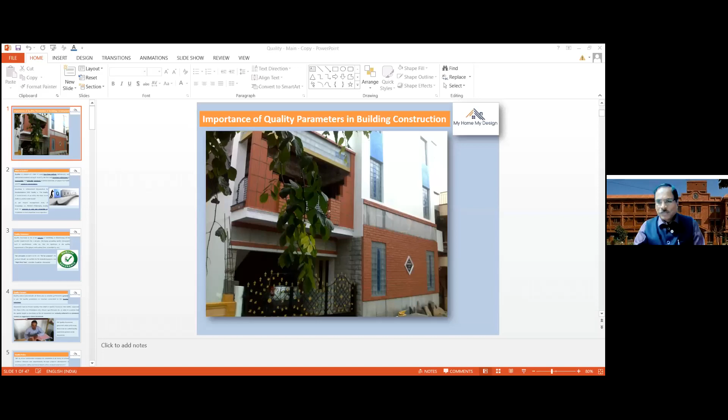So today's topic is importance of quality parameters in building construction. Why is quality important? What are the aspects of quality? If quality is not implemented in the buildings, what is going to happen? And how effectively the quality parameters have to be implemented in the buildings. So this is very, very important.

And what IS standards say, what our Bureau of Indian Standards, or what we call IS standards, says about everything - we will be able to learn with this presentation. So I need all your cooperation.

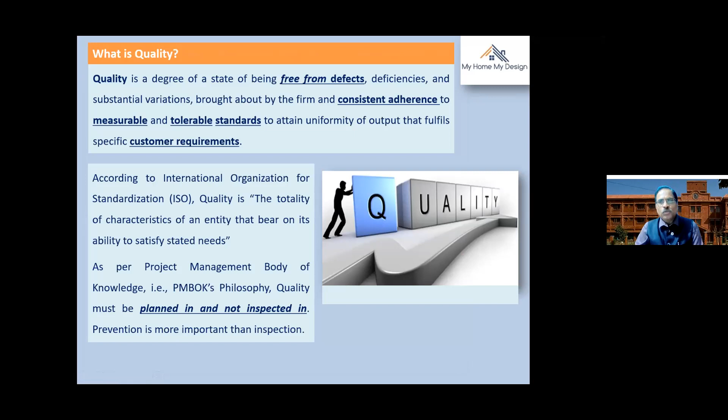So first of all, what is quality? Quality is a degree of state of being free from defects, deficiencies, and substantial variations brought about by the firm and consistent adherence to measurable and tolerable standards, to attain uniformity of output that fulfills specific customer requirements. So that means quality is nothing but the customer requirements - it has to fulfill the customer requirement.

How should it fulfill? It should be free from defects. At the same time, it has to have consistent adherence to measurable standards. So if you compare one product with another product, it has to be measurable. So that is one thing.

And tolerable standards - if slight variations will be there, that slight variation, whether it is in the acceptable standards or not, is probably in terms of mm. So that is why quality should be free from defects, and it should adhere to measurable and tolerable standards as per customer requirements.

According to International Organization for Standardization, that is ISO, quality is the totality of characteristics of an entity that bear on its ability to satisfy stated needs.

As per Project Management Body of Knowledge, that is PMBOK philosophy, quality must be planned in and not inspected in. Prevention is more important than inspection. Yes, when we go for inspection, quality has to already be in place.

So this is what we call quality assurance. Whatever assurance we are going to give to the customer, it has to be documented, in a proper language and a proper record. And the same thing, if you can implement it on the ground, it is called quality control.

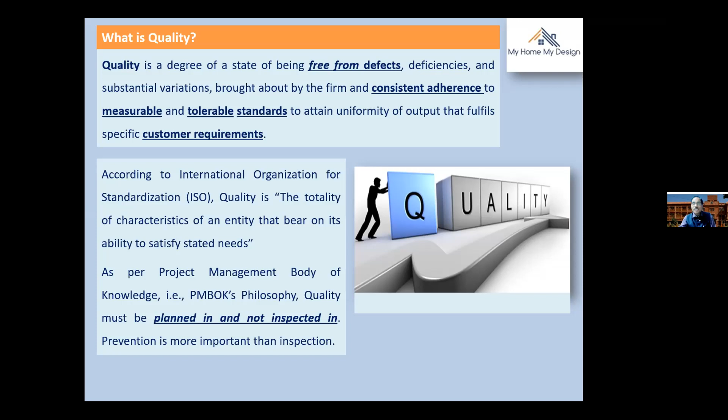So we will see some of the aspects of how we can maintain these quality standards.

That means with quality assurance, we are giving assurance to the customer about what we are going to do in the field. So right in the beginning itself, we state this is our SOP, this is our records, this is our specification, and as per IS codes, this is what we are going to do. So this is the assurance we give in the beginning for the customer - that is called quality assurance.

So before putting it to use, we will confirm that the material is the right kind for our project. That is what is called fit for purpose. To see whether it is fitting for the purpose or not, there are so many tests. So after conducting many tests and satisfying many parameters, only then will we accept the material. So this is called fit for purpose.

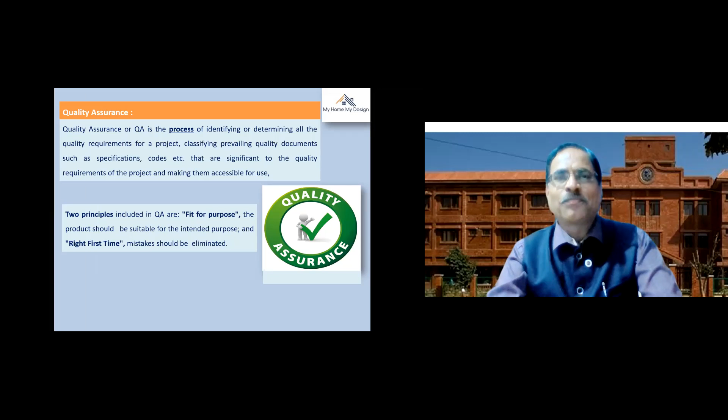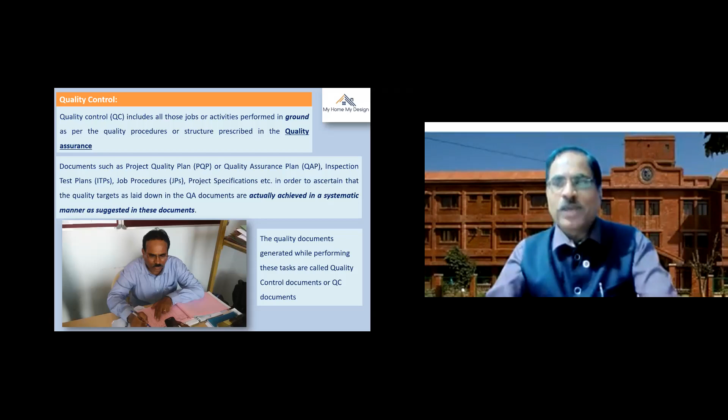Quality control includes all those jobs or activities performed on the ground or project as per quality procedures or structure prescribed in the quality assurance. Whatever we assure in the quality assurance to the client or customer, the same thing has to be implemented on the ground without compromise on quality. This is called quality control or quality monitoring. Somebody has to be there while the construction activity is going on, to see whether all these things are implemented in the best possible way. This is called quality control.

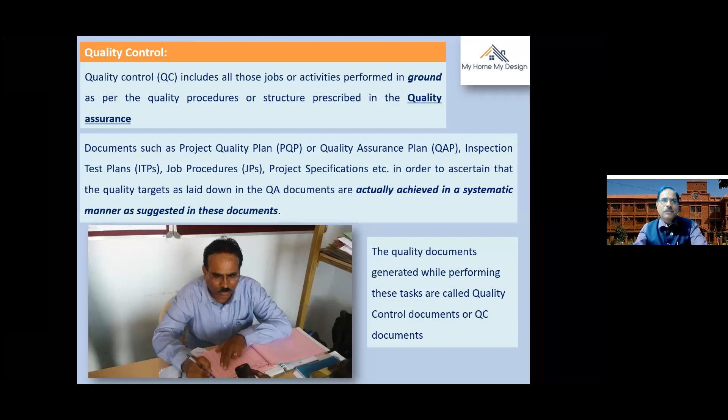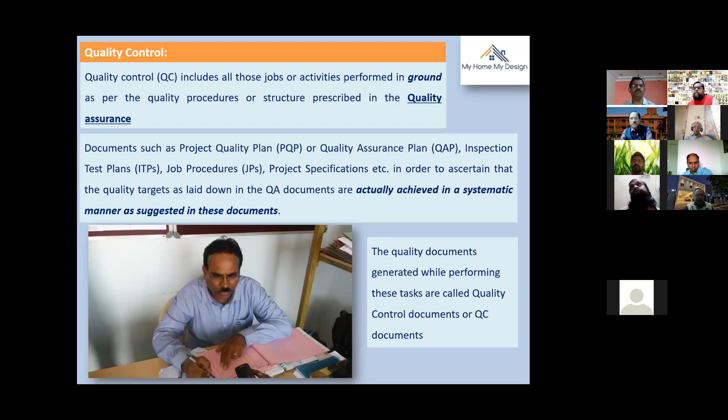Documents such as project quality plan, quality assurance plan, test plans, job procedures, and project specifications are used to ascertain that the quality targets laid down in the QA documents are actually achieved in a systematic manner. The PQP, or project specific quality plan (PSQP), and the project quality assurance plan support the quality assurance engineer to implement all these quality control documents. The quality documents generated while performing these tasks are called quality control documents, or QC documents.

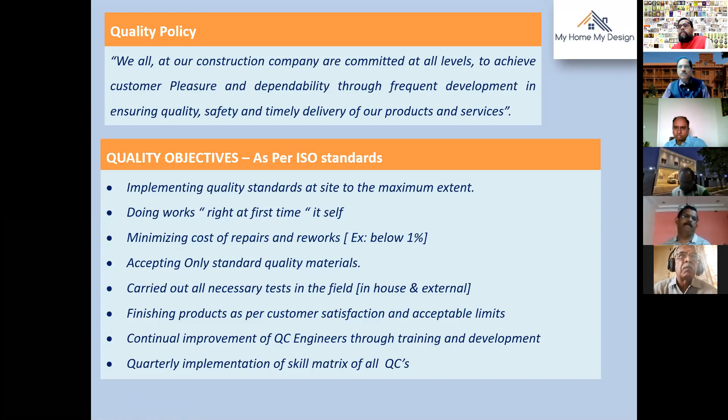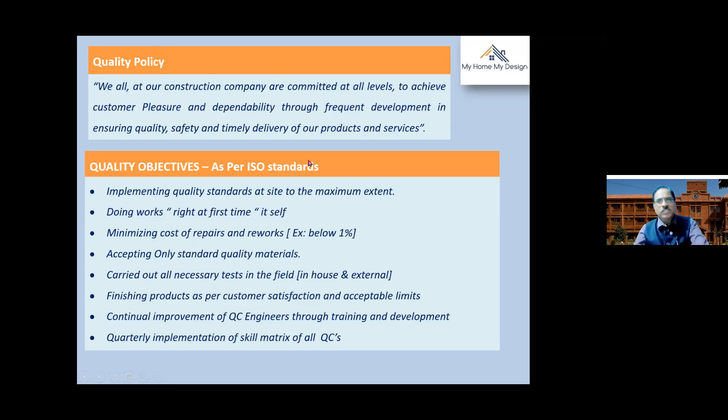Quality policy is simple. Each and every company or organization has its own policy, stating that they are committed to the customer, giving a guarantee that they will fulfill their quality in the coming or ongoing project. This is nothing but a statement. For example, it goes like this: we at our construction company are committed at all levels to achieve customer pleasure and dependability through frequent development in ensuring quality, safety, and timely delivery of our products and services.

This quality policy has to be displayed in the site office or project office, showing the importance given to quality.

Some of the quality objectives, if we introspect, include: implementing quality standards at the site to the maximum extent, and doing work right the first time itself, meaning no rework. Whatever work we do should meet the quality standard. We bring quality into construction and avoid rework or rejob. This is the commitment one should have.

Minimizing cost of repairs and rework - in unavoidable circumstances, rework may happen due to slight modifications of specifications or afterthoughts. But there is a limitation for that - it should be below 1%. Otherwise, if it goes beyond 1% or 2%, it means the project is not planned properly and the professionals have not thought things through.

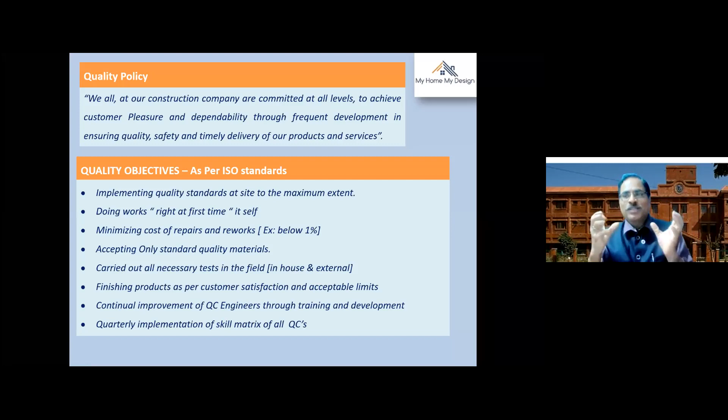Accepting quality standard materials only is very important. As a thumb rule in civil engineering, 70% of the component is material, and 30% is labor or workmanship. If 70% of the component is itself inferior in quality, we cannot assure or give quality for the construction. So we need to accept standard quality material right from excavation till handing over the keys.

We carry out all necessary tests in the field, in-house and external, to ensure the quality standard of materials. There are so many tests, which I can briefly explain in the coming slides.

Finishing products should be as per customer satisfaction and acceptable limits. Continual improvement of QC engineers through training and development is very important - we need to give training to all engineers implementing quality standards at the site. Somebody may be expert in some items, some in finishing works, some in structural works, but we want all-rounders, not just experts in one faculty or another, though we do require those specialists too.

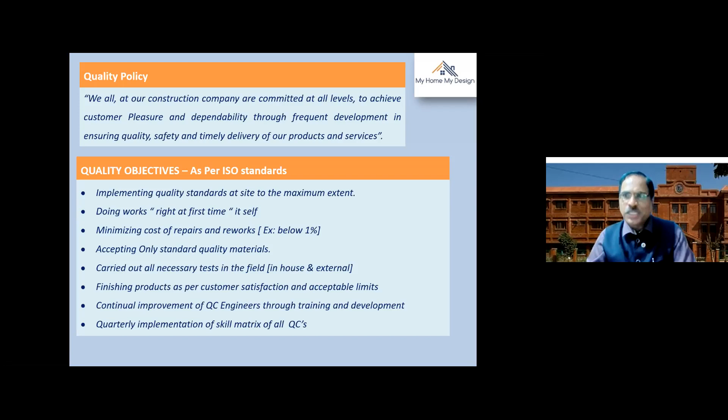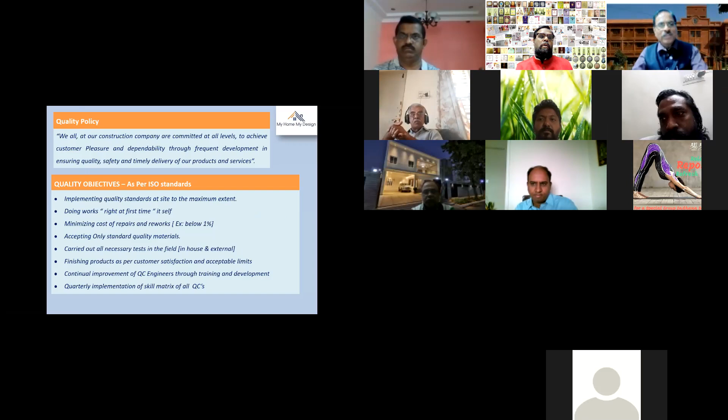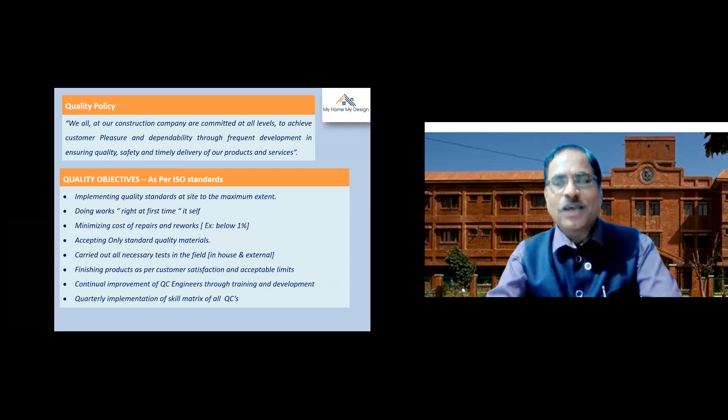If we give training to the QC engineers, overall implementation of quality can be achieved within a short time. Quarterly implementation of a skill matrix for all QCs - quarterly meaning every 3 months, we do tests and interviews and mark their strengths, and how effectively they are doing their work on site. We monitor everything, and based on this skillness and performance, we use this skill matrix for all engineers to conclude which engineer can do wonders in the field.

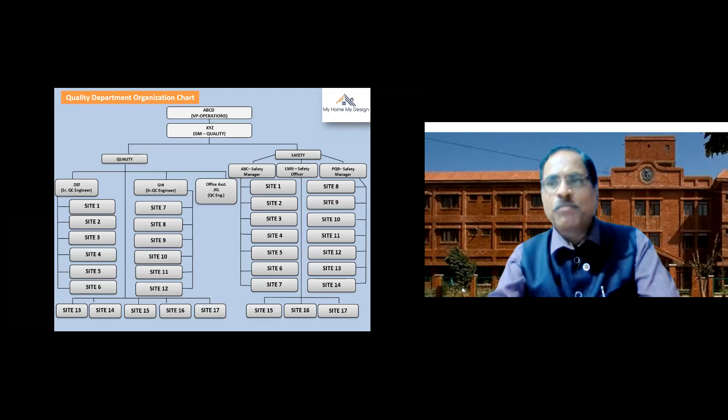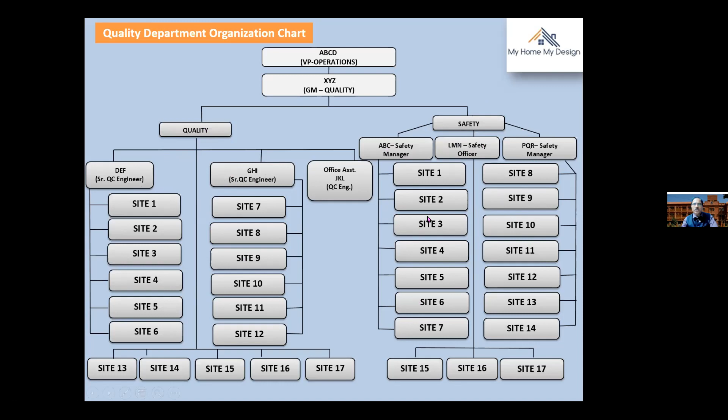This is just the quality department organization chart. Any standard project will have this type of organization chart. For example, the VP is the operations head, and the quality head reports to the VP. He manages not only quality but also the safety organization. Respective engineers and teams across many sites report to him, and in safety, many people assist him so he can monitor everything.

So what is the role of a quality control engineer? This is very important. The quality control engineer reports to the project manager and is responsible for many things. He must ensure quality records, acceptance limits - which are always plus or minus 1mm, 2mm, 3mm - machinery and equipment calibration certificates, and documentation of specific items and building areas are prepared and collected in accordance with project requirements.

He must coordinate with the planning and quantity surveying department to ensure milestone dates are understood for each activity. The quality job is challenging - the quality control engineer not only monitors and maintains quality aspects but must coordinate with the QS department since progress is very important for any project. He must identify milestone dates while not compromising on quality - balancing both progress and quality monitoring.

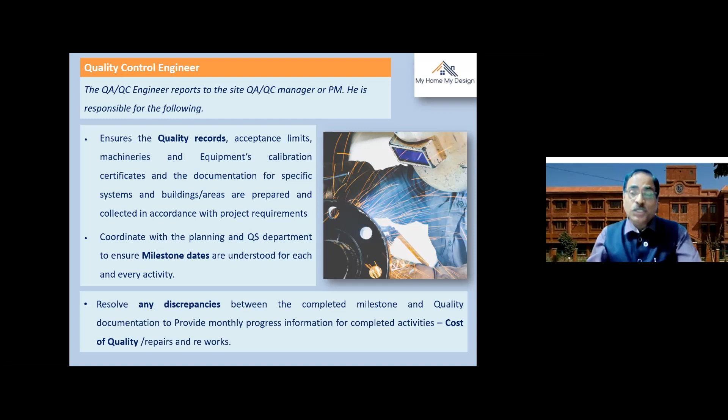He must resolve discrepancies between completed milestones and quality documentation, and provide monthly progress information for completed activities, cost of quality, repairs and rework. If repairs happen, why did they happen? What is the reason, and what is the cost involved? Everything has to be identified and documented in these records.

He must maintain all quality related documents on a daily basis, and get them certified from the project manager, project management consultants, and clients. All points mentioned in the checklist - before, during, or after respective activities - must be strictly followed and updated with the signature of the site engineer, project manager, and client's representatives on the same day.

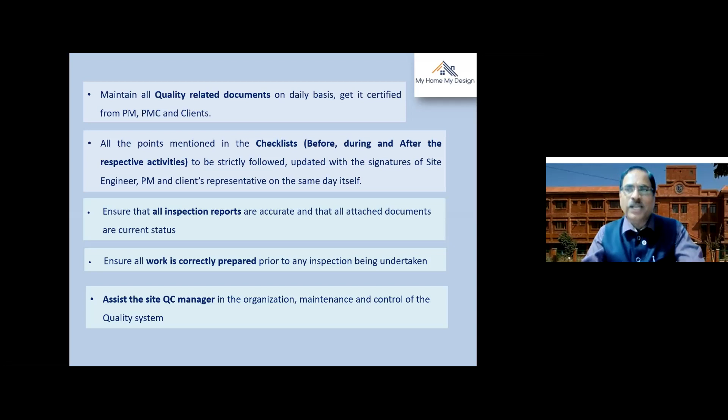This is going to be very, very important. If something happens in the construction, all these documents are witnessed by many people - project engineer, project manager, quality engineer, and the client - they all put their signatures. This is actually the right method to be implemented in all project sites.

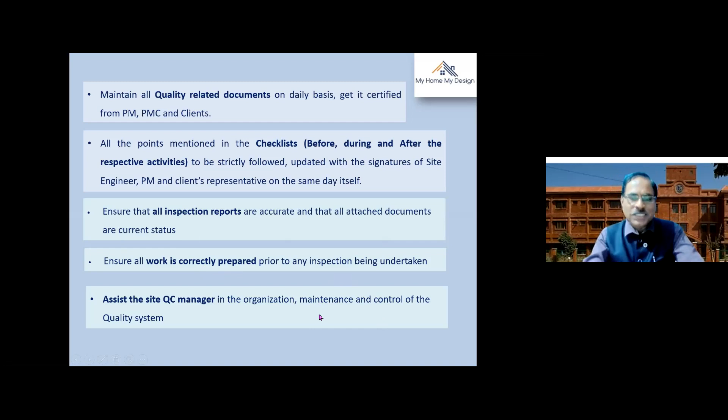He must ensure all inspection reports are accurate and all attached documents are current. He must ensure all work is correctly prepared prior to any inspection being undertaken, and assist the site QC manager in organization, maintenance, and control of the quality system. These are important points to be implemented in quality control, and he must prepare non-conformance reports to the QA manager and assist in developing corrective actions.

What does non-conformance mean? As the name indicates, there are measures as per IS standards, our specifications, bill of quantities, and ISO standards. When something is not in conformance with civil engineering standards, it's called non-conformance. We need to identify that, and a report has to be prepared and submitted to the quality manager - this is called a non-conformance report or NCR. The project quality engineer has every right to raise an NCR if he is not satisfied with any activity.

He must review work procedures and method statements for compliance with good practices and the contract or tender documents. These method statements and work procedures are very important - they explain how each activity has to be carried out as per civil engineering norms. For example, earthwork is not an ordinary thing - it has to be done as per specifications, as per line and level, and everything has to be monitored. Step-by-step procedures exist, and the activity must follow that procedure. This is called work procedures and method statements.

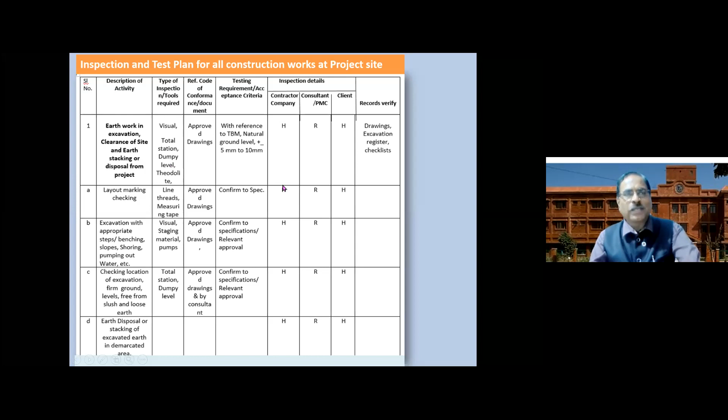For example, the chart will help us identify some of the factors here. I will not go into full detail, just mention one or two items - the inspection and test plan for all construction works at the project site.

This is called quality assurance, QA. So the test plan - we are submitting this test plan in the beginning to the client.

So what is this? Serial number, description of activity. For example, earthwork excavation, clearance of site, and earth stacking or disposal from project. Imagine this is an activity.

So what are the methods, how it has to be done? Type of inspection - this is visual inspection, and necessary tools required: total station, dumpy level, theodolite. With the help of this, the excavation can be carried out. Reference documents are approved drawings, testing requirement, acceptance criteria.

With reference to temporary benchmarks, natural ground level, plus or minus 5mm to 10mm - this is the tolerance factor accepted here. Coming to the inspection point, contractor company is held responsible. Consultant is the reviewer, or PMC is the reviewer. Client is again responsible.

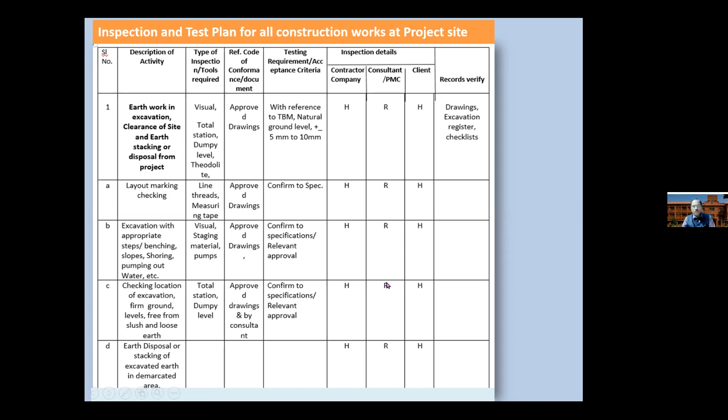Coming back here, for earth disposal or stacking, again the necessary total station, approved drawing, and contractor held responsible. Reviewer - PMC is the reviewer, and client is held responsible. Sometimes PMC is going to be the witness for the particular item, important work here.

He has to witness and put his signature here to determine the maximum dry density and optimum moisture content. How to do that? Hot air oven or rapid moisture meter - this is the method of instrument we are going to use for this soil test. This is the tool we are using.

The approved drawings are as per IS 2720, 1973. As per this, we are going to do this, confirming standards, confirming specification. Who is responsible? Contractor is held responsible. PMC is the witness. Client is also reviewer.

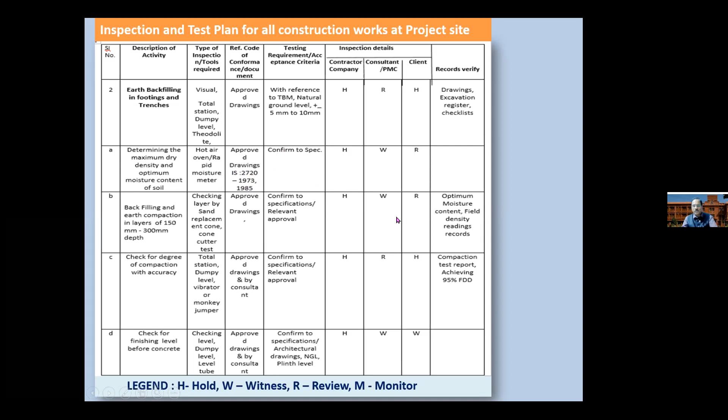So like this, there are many charts. With this chart, we can cover the complete activities. Coming to the strategy or business plan, these are all the important points we need to cover.

First one is statutory and quality documentation. The project name has to be displayed here, and the project duration, month-wise, has to be displayed here, along with the remarks - what are the comments to be marked here.

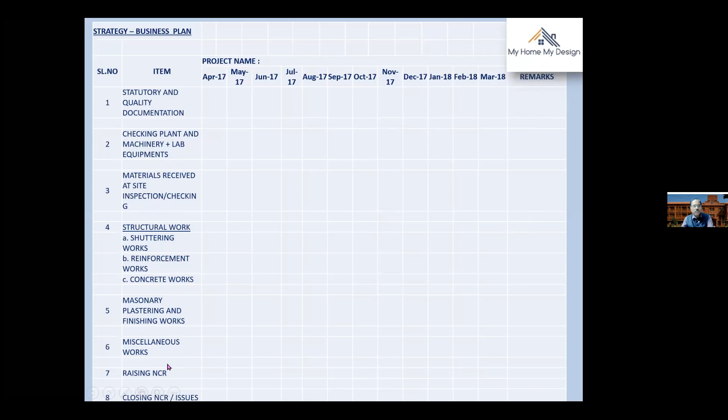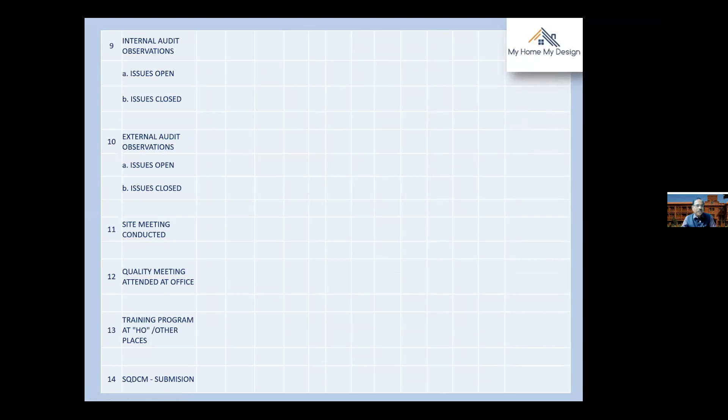Statutory and quality documentation covers: checking plant and machinery plus lab equipment, material received at site, structural work, shuttering, reinforcement, concreting, masonry, plastering, finishing, miscellaneous work, raising NCR, closing NCR, internal auditing, external auditing, site conducts, quality meetings, training program, SQDCM. These are all the points we need to go for.

Coming back to this statutory and quality documentation, why is it very important? Statutory documents, as per government norms, some of these documents are very important, and without these documents, construction will not happen.

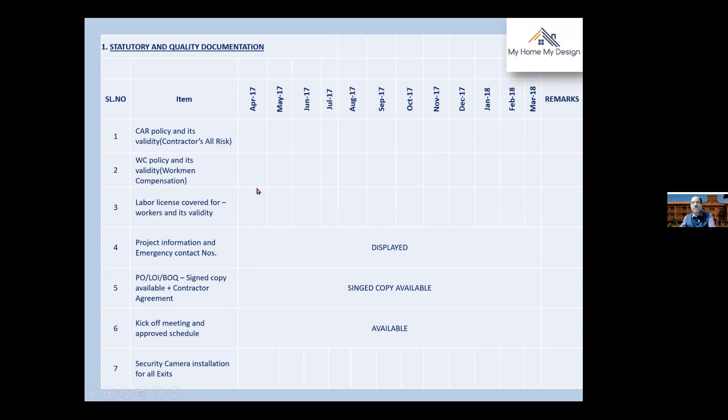Every point here is very, very important. We are not supposed to neglect not even a single point here.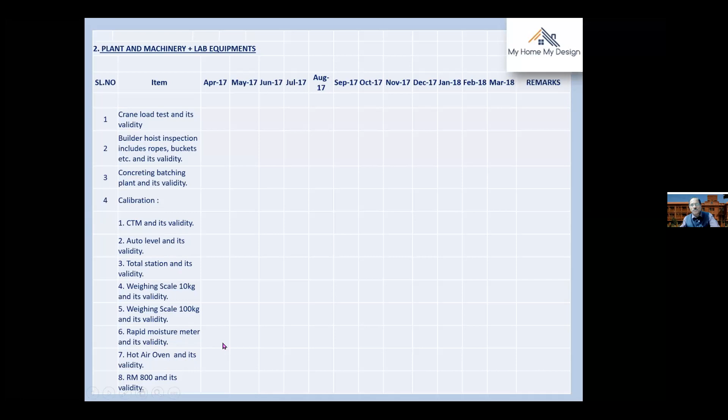Calibration is again important for compression testing machine, auto level controller, total station, weighing scale 10 kg, weighing scale 100 kg, rapid moisture meter, hot air oven and its validity, RM 800 and its validity. All these things are very necessary and important.

This is my favorite chapter, called material checking. For each and every material in the project, we need to examine it, go for testing, and after it satisfies the parameters, only then it can be accepted. Otherwise, if it doesn't meet requirements, the quality engineer has every right to reject that material if it's not in the quality standards. For example, RMC, ready mix concreting M35 grade.

Imagine this is M35 grade. What are the test acceptance criteria? Daily appearance, the uniformity of the concrete checked visually, slump test, 7 days strength, 28 days strength. These are some tests, and third party testing once in 2 months. This is the test for RMC.

Coming to cement: manufacturing test certificate, float test, approved brand - whether it's an approved brand or not, the brand name to be mentioned here. Initial setting time and final setting time for the cement. All these things are very, very essential and necessary.

Apart from tests conducted in our in-house lab or field labs, randomly third party tests also need to be conducted for compressive strength, soundness, standard consistency, fineness, and setting time. Once in a while we can take some samples and send them for third party testing, that is called NABL accreditation laboratories. There also we need to check.

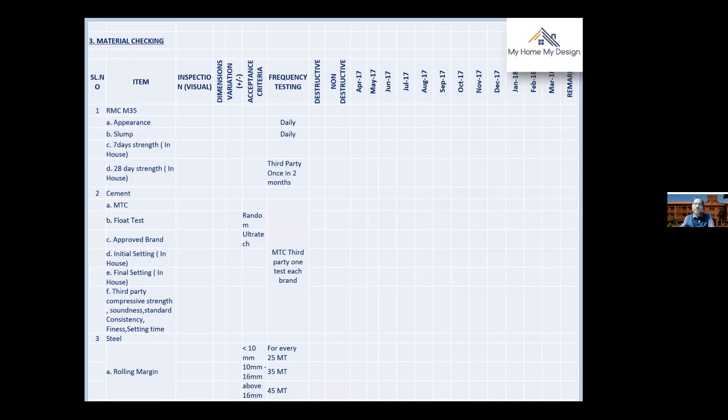Rolling margin: for rods less than 10 mm, for every 25 metric tons we need to go for the rolling margin. If the steel bars are between 10 mm and 16 mm, for every 35 metric tons we can go for this rolling margin. And for above 16 mm diameter rods, for 45 metric tons we can do this rolling margin.

For bricks: dimension, manufacturing test certificate, third party, compressive strength, water absorption - this is visual check, and 20 bricks have to be taken from 3 loads of bricks, that means 6 to 7 samples each, subjected to compressive strength. If it is 35 kg per centimeter square and above, then only it can be accepted as good quality bricks. For each source, 3 numbers to be tested from 20 bricks.

These are some standards. We are not supposed to compromise on these standards. For fine aggregates: sieve analysis, fineness modulus, third-party test - these are all the tests.

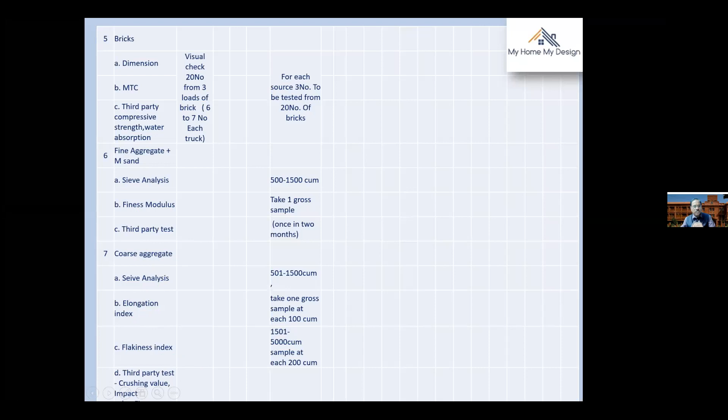Coming to coarse aggregate, again the same thing. Elongation index is one of the important aspects. Fineness modulus, flakiness index, third-party test, crushing value, impact value. And soil is very, very important - the foundation entirely depends upon the safe bearing capacity of the soil. Here also Proctor test, core cutter test, in-house and third party, once for each source of earth at every 100 square meter of compacted earth area. After compaction also, this core cutter test has to be done.

Moisture content, and coming to structural steel: rolling margin, tensile strength, elongation test, bend rebar test, and tiles - MTC, third party test.

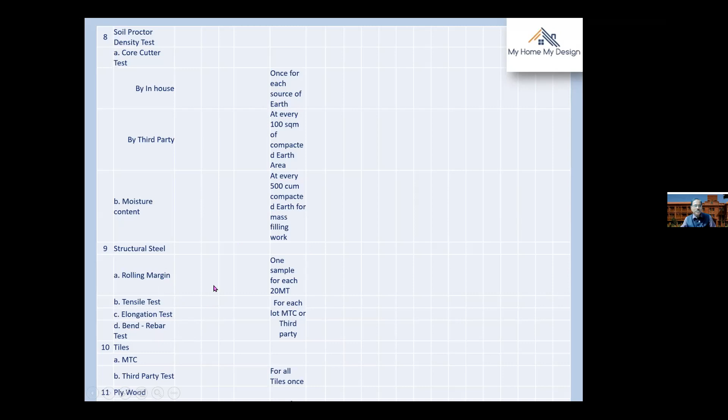Plywood also, many tests have to be conducted. Paints, MTC, kerb stone MTC, paver blocks, electrical wires, cables, conduits, switch box, GI wire, plumbing works, UPVC pipes, sanitary pipes, fixtures, firefighting, MS pipes, welding rods, sprinkler, HVAC. For all these things, manufacturing test certificate, MTC, is required.

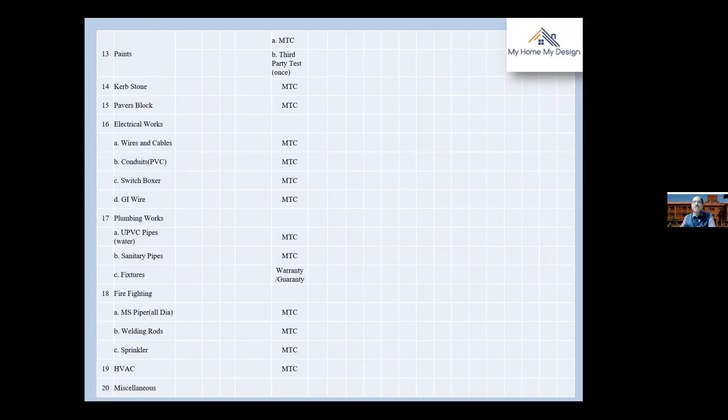So these are all the gist of the items. There are so many materials, so many items. I've mentioned only the important points here. All these important points have already crossed more than 20-25 items. If all these materials are tested as conducted, then only we can say that we are implementing quality standards. So that is pertaining to the material.

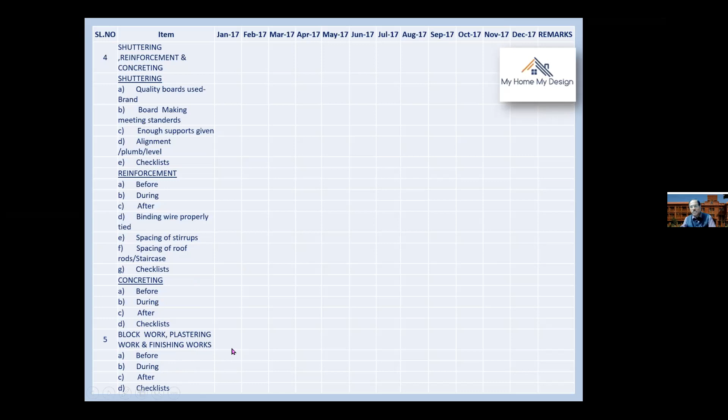Coming to the miscellaneous aspects also—road, drawings, STP, ETP—before, during, after checklist, and raising NCR. If non-conformance is happening, how many NCRs we have issued, how many NCRs we have raised, and whether these issues have closed or not. If it has to be closed, it has to be done in a proper way.

What is the root cause, why it has happened, what preventive actions we have taken, and what is the reason why it happened. All these things, documented with evidence, have to be proved, and then only the issues will be closed.

And internal audit—so internal auditing is the team. The site inspection has to be carried out at each and every stage, different stages of the activity or project. How many points, how many times the internal audit has been done—monthly once, or 3 months once—everything has to be noted here.

Issues open—how many points they have raised, and out of that, how many points your project site engineer or project engineer has closed. Everything has to be recorded here.

If you are very much familiar with the internal audit and giving importance to the internal auditing points, then external audit is very easy to tackle. The external audit is nothing but a third party person, not in favor of the client or customer or engineers—entirely an independent agency, third party audit or external audit.

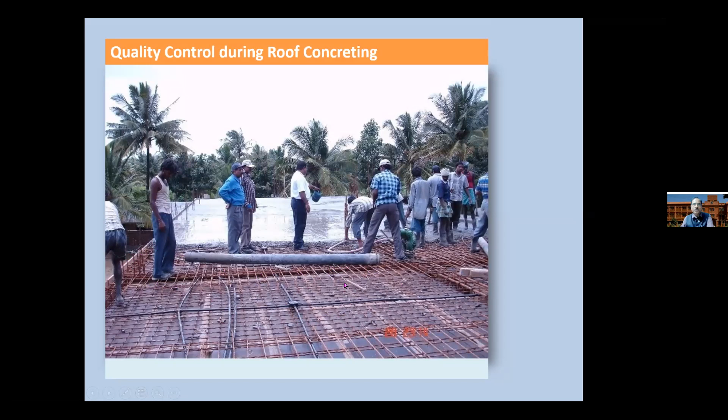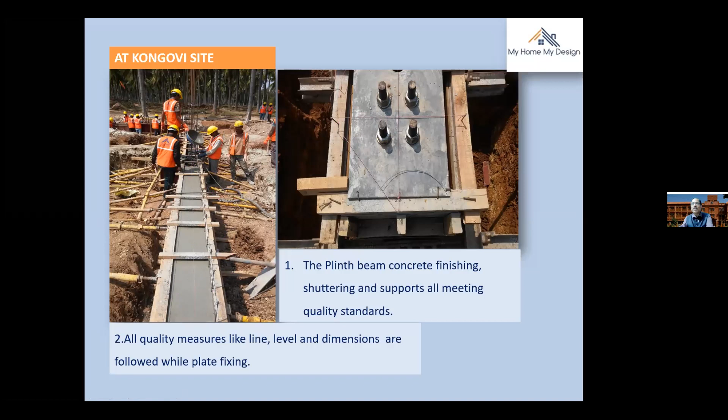And with the help of monitoring, even for the bolts, central foundation bolts, how effectively the center of gravity has been transferred in the field. So even for the minute details, it has to be carried out effectively. That is why quality parameters, quality is very, very important.

If we can do such a type of quality, we can enjoy it, and on the same night when you go to sleep, you will have a satisfaction that today I have done some quality work. So that is the kind of work we need to do.

This is what I already explained before concreting. See, this is before concreting. If these are all in line, even after concreting you can maintain the same line here. So this is what we need to introspect ourselves.

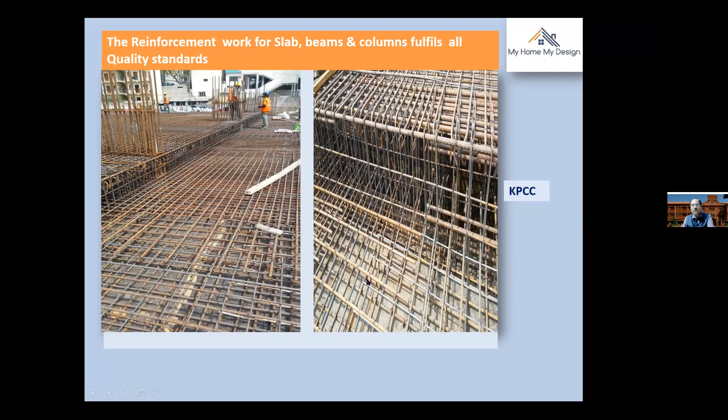Here also in the sunken beam, how closely the stirrups have been monitored, and how effectively the top bars and bottom bars have stayed in position. This is very, very important. We have to give even the minute details that much importance.

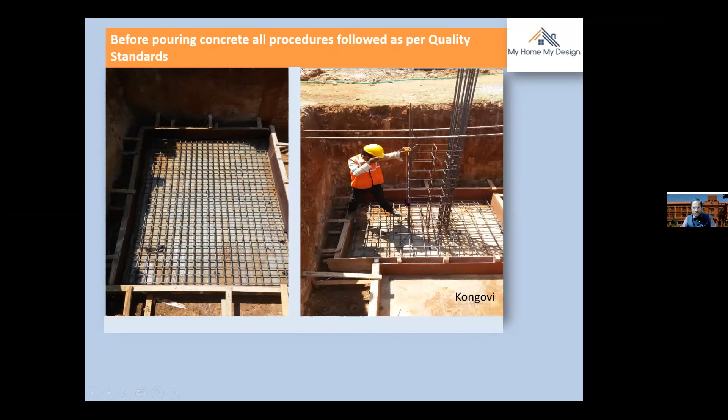And here, before concreting, see how effectively the plumb has to be transferred in the ground. This is one example for the Kongovi Electronics project, what we have done.

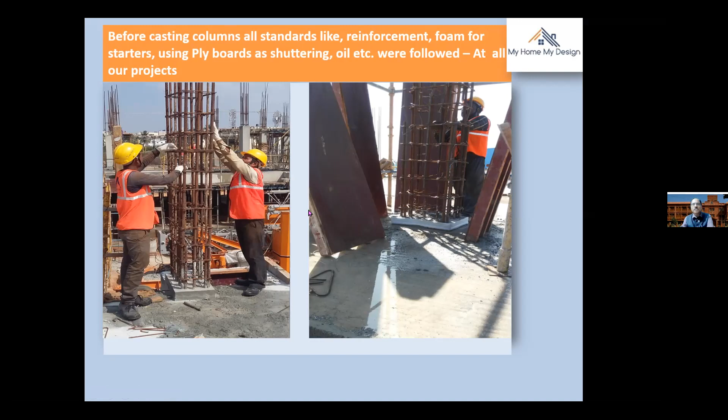Before casting columns, all standards like reinforcement, foam for starters, using plyboards as shuttering oil, etc. were followed at all our projects. See how effectively the gloves, stirrups and everything are monitored, and starters, the foam for starters, plywood with waterproofing oil, shuttering oil and everything in place. These are some of the photographs I'm showing for points we need to check while visiting the buildings.

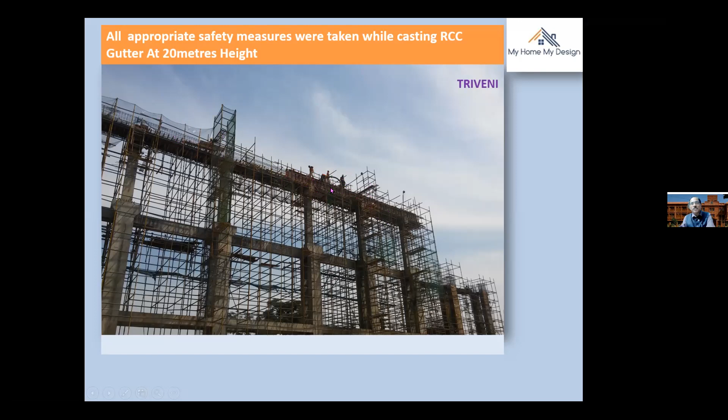Safety is important, human lives are more important, even rather than quality. Compared to quality, safety is paramount important. We are giving utmost importance to safety also here. And see the same gutter, RC gutter at 24-meter height, length 110 meters, under progress, fulfilling all standards.

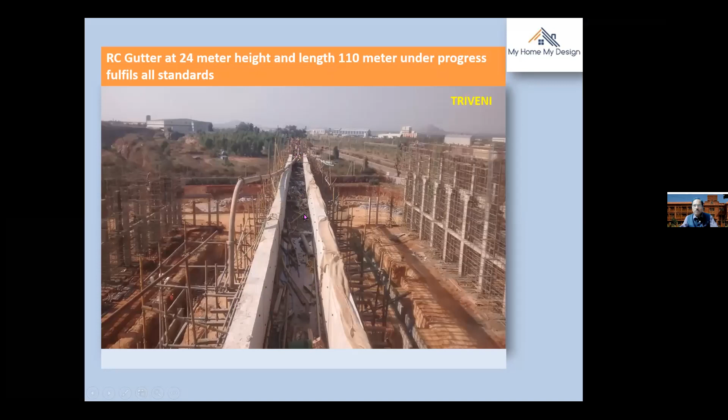Imagine this is 110 meters in length, nearly 350 feet, with a gutter of 1.2 meter depth and 1.0 meter width and 30 centimeters. The two gutters are being carried out here, and the concreting is happening here. Over the full 110-meter length, the line, alignment, plumb, everything, quality standards are maintained.

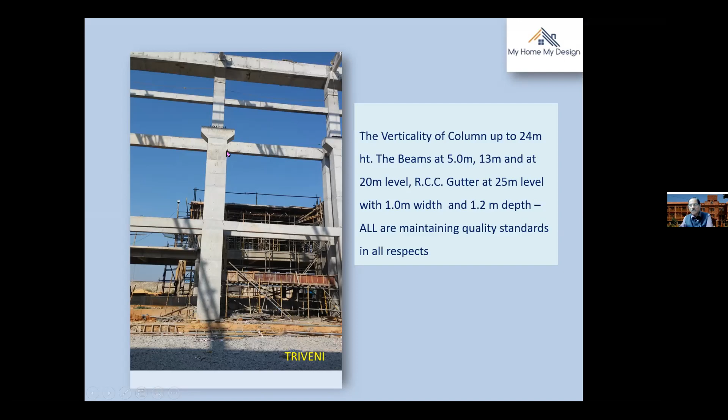You can see in the photograph itself the alignment, length, plumb, everything. So this is the quality I'm expecting. Even if you give importance to the minute details, this is the result you can expect after quality, and this is one example I can give.

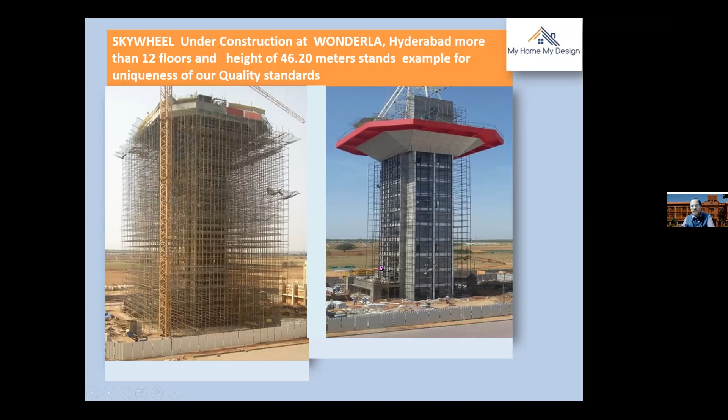You can see the next photograph, the close-up view, you will come to know. This is under construction, the sky wheel is happening here. This is the finishing work, the glazing and everything started here - the Wonderla Hyderabad project.

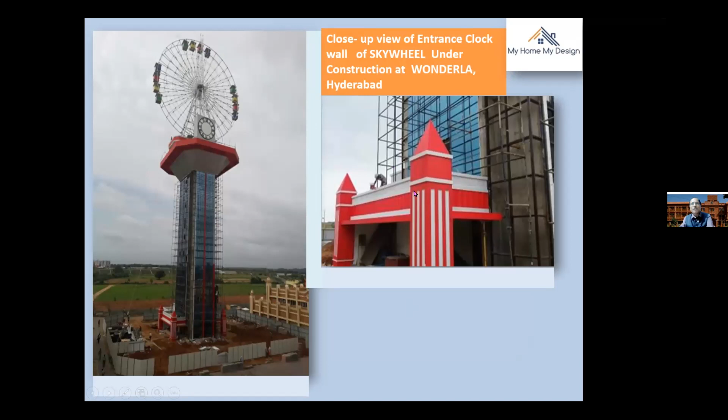If it is 20 centimeters, yes, exactly - from here it is 20 centimeters, and here also it is to be 20 centimeters. That means all the materials have to be intact in a tight, waterproof platform. Then only can you expect very good quality. These are all things necessary in construction.

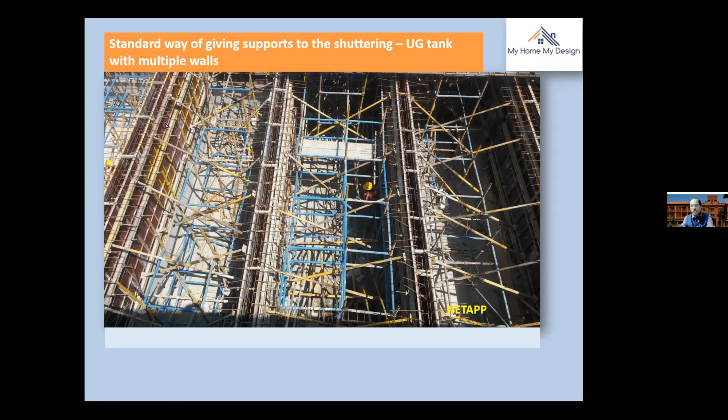And next, quality auditing during the construction of projects. What is the necessity of this auditing?

The red letters indicate that whenever I go to the site and find faults or improvements needed, I always point it out in red. For example, earth backfilling is okay for this particular item, but proper compaction with core cutting needs to be done before 22/7/2016 - that was the deadline I gave, and it should achieve more than 95% proctor density. This was the point I raised in the auditing.

See how effectively the site people took it seriously - the same day they started compacting, and core cutting results everything they started. The core cutting was done on 16/7/2016, well in advance of the 22/7 deadline I had given. At 6:25 p.m., the proctor density achieved was 98.32%. This is the evidence and documented proof.

So this is what I mean by quality documents, which I already mentioned - that is very, very important.

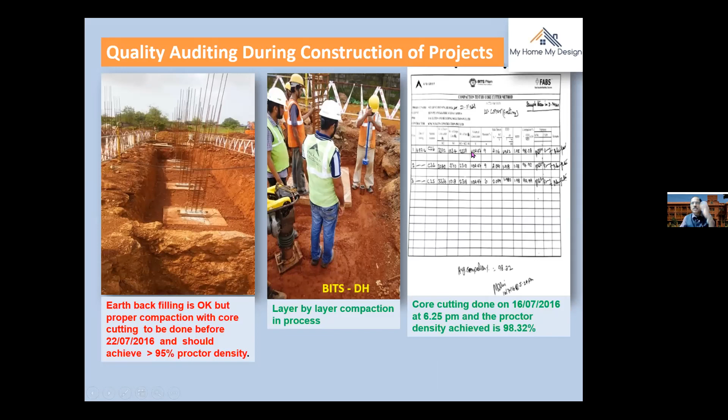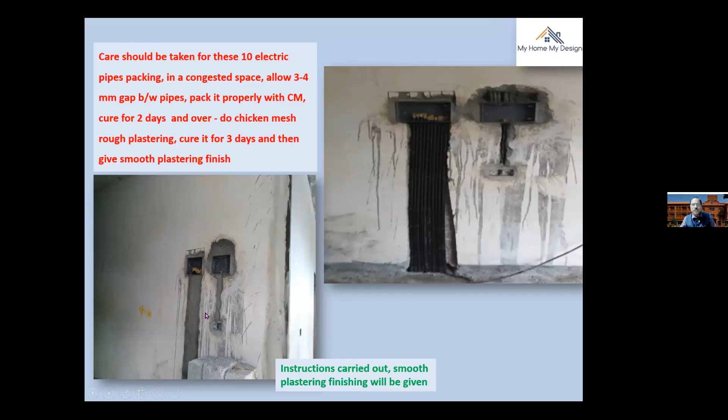And here, this is not acceptable - 10 pipes coming at one place, chasing like this. This is not a standard method. After giving instructions here, they followed the same instruction and fulfilled it. So this is the effective way - this is what we are expecting.

In the NetApp project, the west side compound wall near the main building had bulging that needed to be rectified. See here, how much bulging you can make out from the naked eye itself - this is not acceptable. So in this case, an NCR was issued.

I gave the solution also - rectified with the grinding machine. They completed it effectively - in the same photograph you can see the compound wall bulging rectified by grinding.

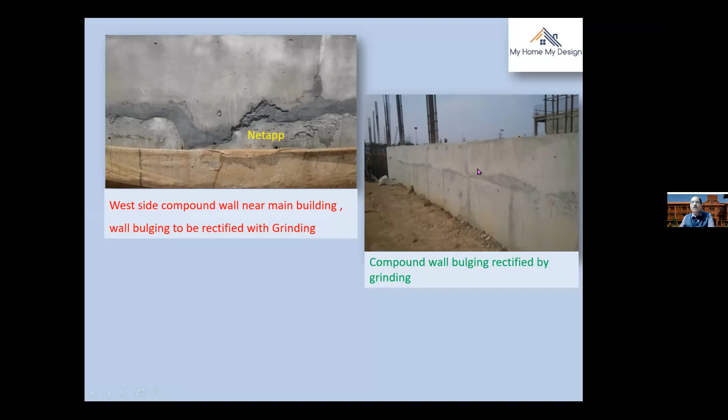Even if mistakes happen - I'm not saying we are Brahma or Indra that we can construct without any mistake, but mistakes will happen. But rectification at the right time, within the setting time itself, that is called intelligence. If we can do that, yes, we can say that we are also implementing quality standards in our projects.

And here also in Tata Power, you can see that the gap is more. That gap is not to be filled with mortar or something like that. I have suggested concrete. After concreting, they have done it here.

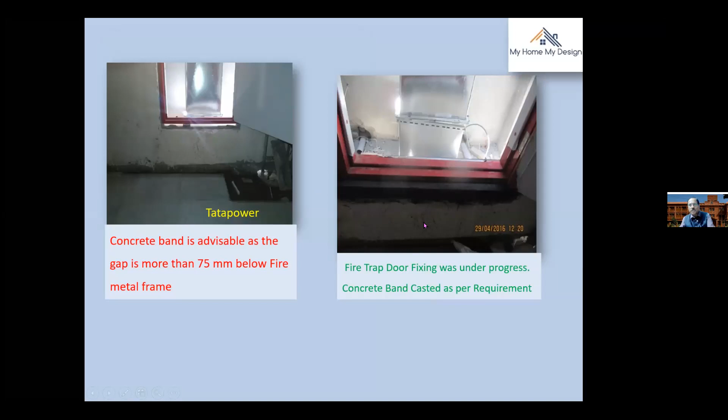So that was the result. And you can ask here, so quality audit for completion stage projects. What I have shown up to this time is undergoing projects. And here, after completion projects, in the pandemic situation, on October 4th, 2020, this is an example for Mr. Chandrasekhar's residence construction at BDA layout, Banashankari, 6th stage.

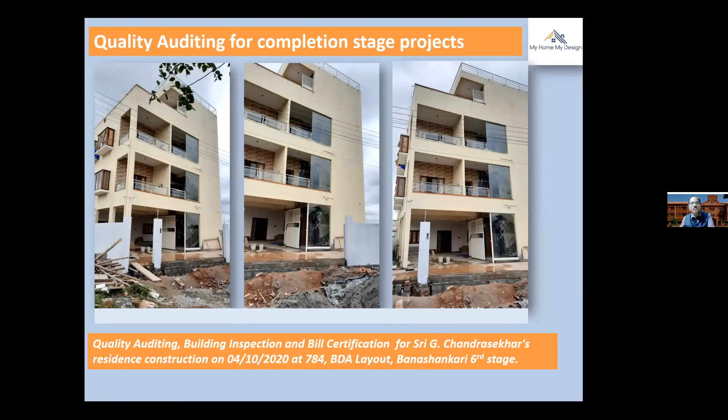Seeing it from the outer look, this project is very good, sounds to be okay. But when he entered inside, there are so many points for observation. See here, for example, the support for the wash basin they have given is not sufficient. Just on the granite 20 mm thick slab, they have placed this wash basin. So just by touching itself, it is shaking.

So in order to not compromise with the quality, and for the aesthetic point, what I have suggested is this L clamp with stainless steel, 450 mm for the wash basin side and 300 mm for the wall side. If we can do like that, this can be minimized.

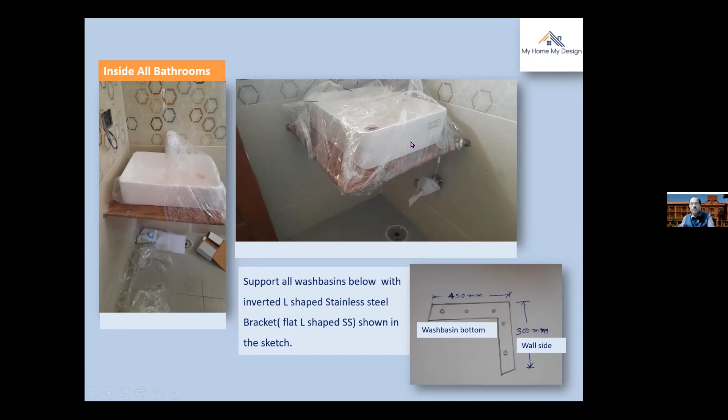And inside the staircase, these are all the dampness points. So examined here and the necessary measures, I have given the instruction. Even for the pipes also, see here, the pipes' verticality is very, very important. Otherwise, if the water pressure is more, bulging will happen and this is not going to be long lasting.

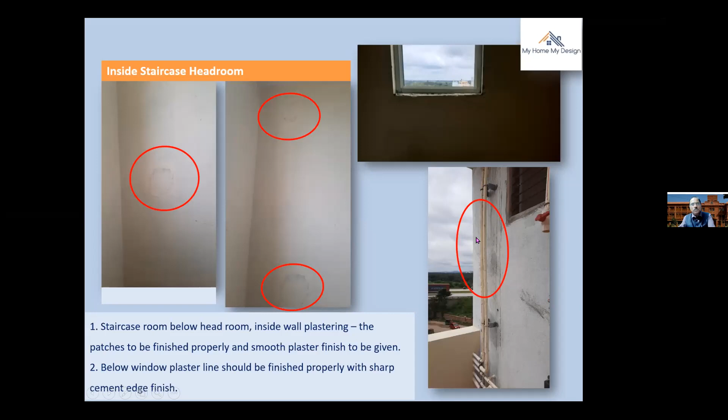Coming to one more important project, recently, just last month, I've done the auditing for this particular project. This is a 4-floor building, having, I think, A block and B block, consisting of more than 180 flats, in Singasandra, Bangalore. While seeing the elevation, quality is maintained, we can come to that conclusion.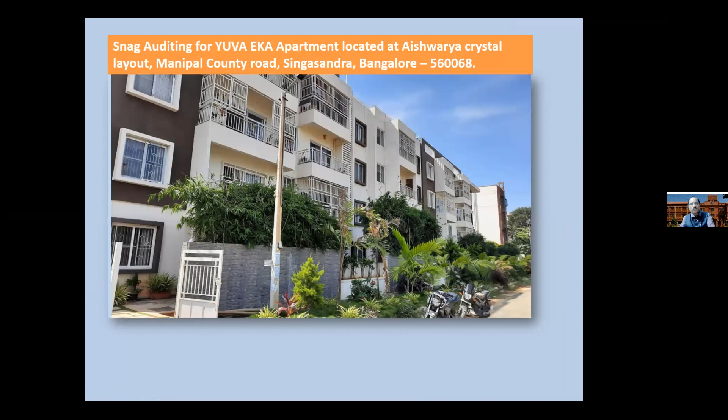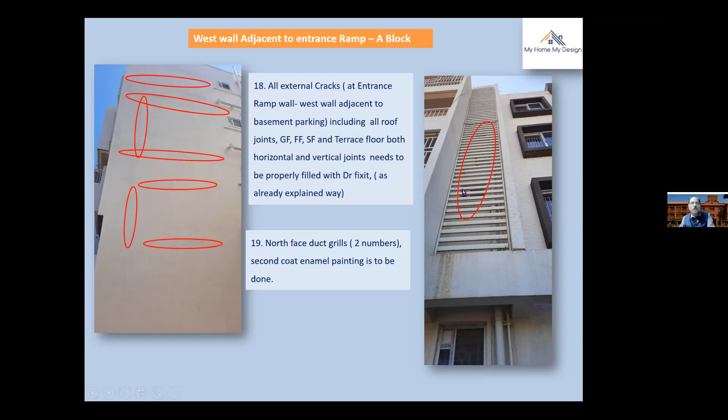But inside, there are so many points. See here, all external works, so many cracks are there on external walls. These cracks have to be minimized and this has to be attended in a regular fashion. So this is my observation point. And here also, second coat painting, they have not done. The people are occupied and the builder has not given importance to the quality here. And here, the worst affected factor, the quality here, is absolutely bad.

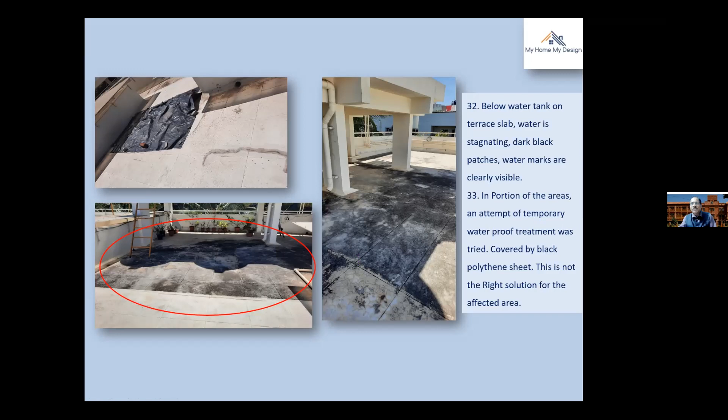The waterproofing work they have conducted here, they have done all patchy work here, a dark circle below the water tank. So much water is seeping here. As a result, there is a dark circle here, black patches are there. Even below the flat, people are hesitating and they are not willing to stay there in the houses because of so much dampness, and they requested this while doing the auditing. They came and literally met me and said, sir, please come and do some justice here.

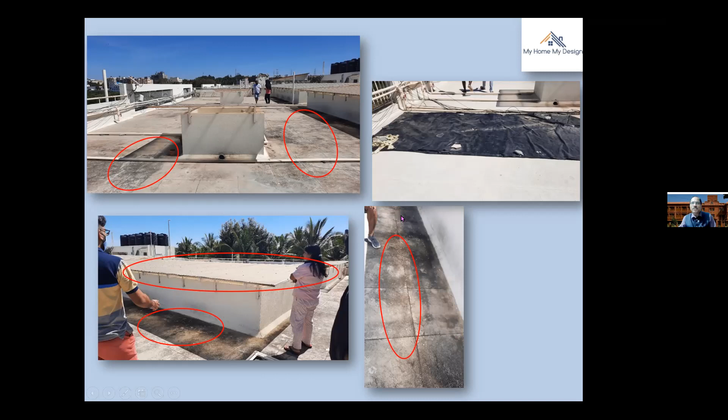The next photograph, see here, the people requested me to attend their flats and inspect them, to see what best can be done. That is what they are expecting here. So while doing the auditing, these are all important points. While taking up the projects, each and every point is very, very important. If you're not doing justice, we have to take the cursing or blame from the people. So this should not happen.

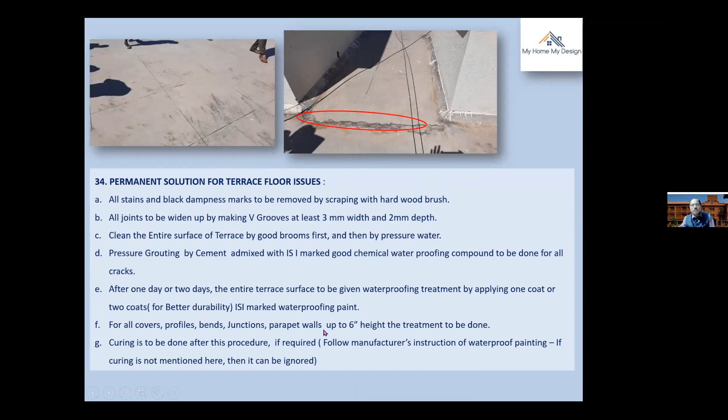So after all these things, this is, I think, going to be the end of the presentation. These are all the suggestions I have given for the same projects. Permanent solution for terrace floor issues, how it has to be done effectively: making black dampness marks removed by scraping with a hardwood brush, and the joints widened by making V grooves 3 mm wide and 2 mm deep. If they can do all this, it's nothing but a postmortem, but some guarantee can be given, not full guarantee.

What I mean to say is, if we can do the project right in the initial stage itself, we can minimize all these problems. So I hope this presentation is useful and people can understand the importance of quality. My sincere request is please take professional help for all projects, and don't go for ordinary masons or unprofessional people, don't experiment with your construction because it is hard-earned money. As the saying goes, in a lifetime we can construct either one building or probably two buildings, so we don't want to take any risk or chances. Thank you very much for your patient listening. Thank you very much.